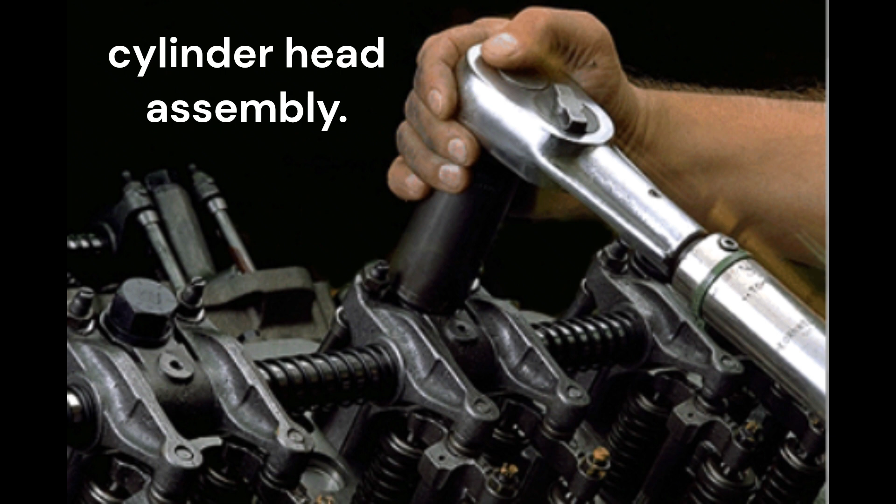Welcome back. Today we're taking a look at the cylinder head assembly. In this segment, you will learn about cylinder head components and the function of each component. You will also learn how an overhead cam engine operates and how its valve train differs from a push rod engine.

Cylinder head assembly. The cylinder head and its components are designed to make sure that the valves open and close, and that fuel is injected at the proper time for peak engine performance.

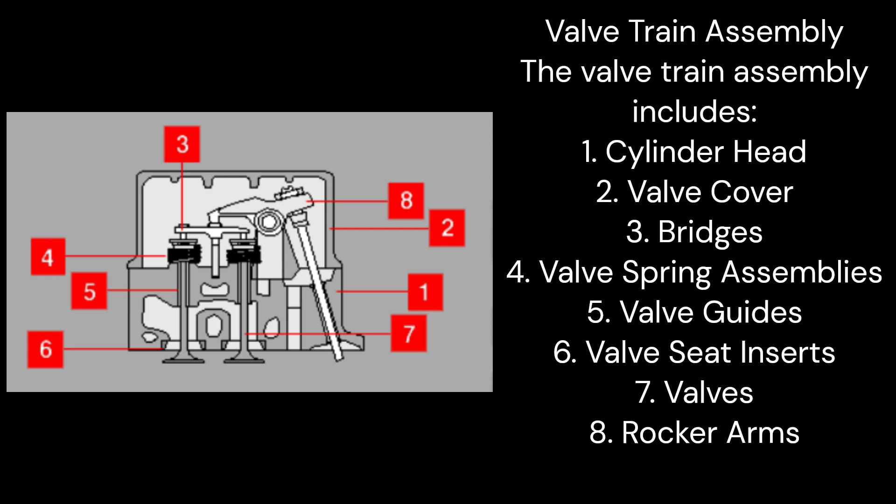Valve train assembly. The valve train assembly includes: 1. Cylinder head. 2. Valve cover. 3. Bridges. 4. Valve spring assemblies. 5. Valve guides. 6. Valve seat inserts. 7. Valves. And 8. Rocker arms.

Cylinder head. The cylinder head is a separate casting which seals the top of the engine block and holds the valves, injector or pre-combustion chamber in place. It also houses the valve train, some fuel system components, and water passages for cooling the parts.

Gasket and spacer plate. The cylinder head is seated to the engine block with gaskets, a spacer plate, and bolts or studs.

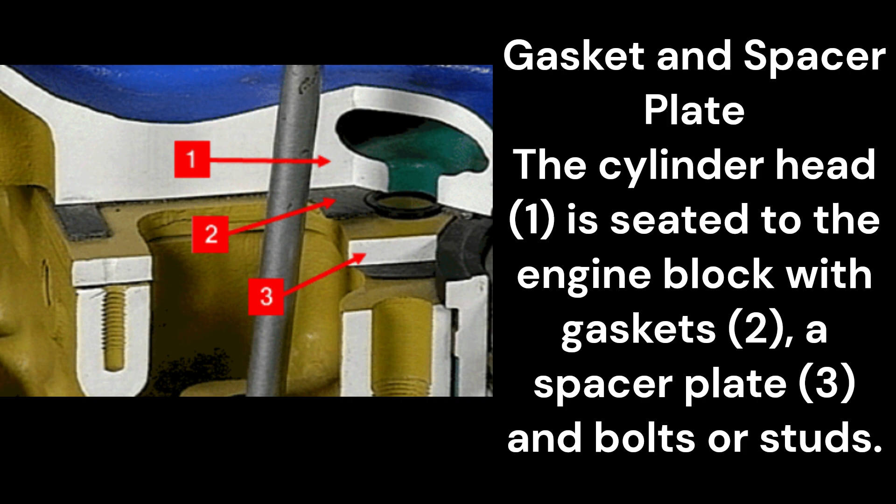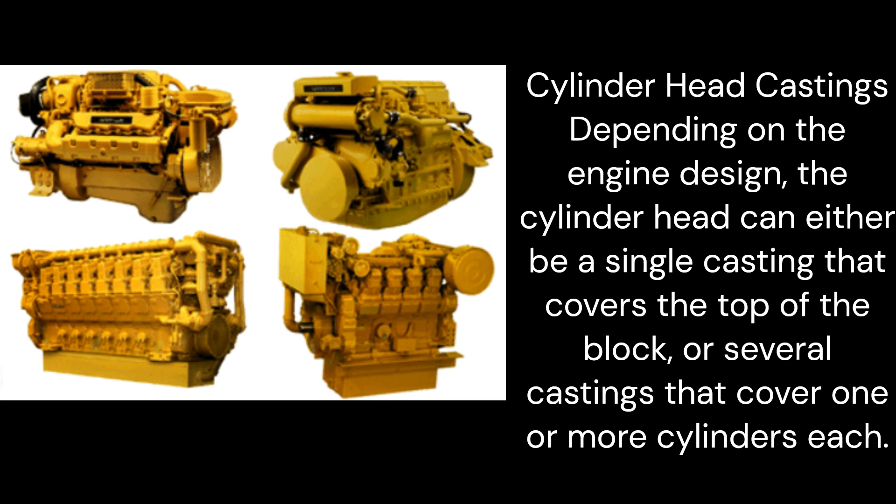Cylinder head castings. Depending on the engine design, the cylinder head can either be a single casting that covers the top of the block, or several castings that cover one or more cylinders each.

Valve cover removal. You must remove the valve covers in order to reach the valve train components.

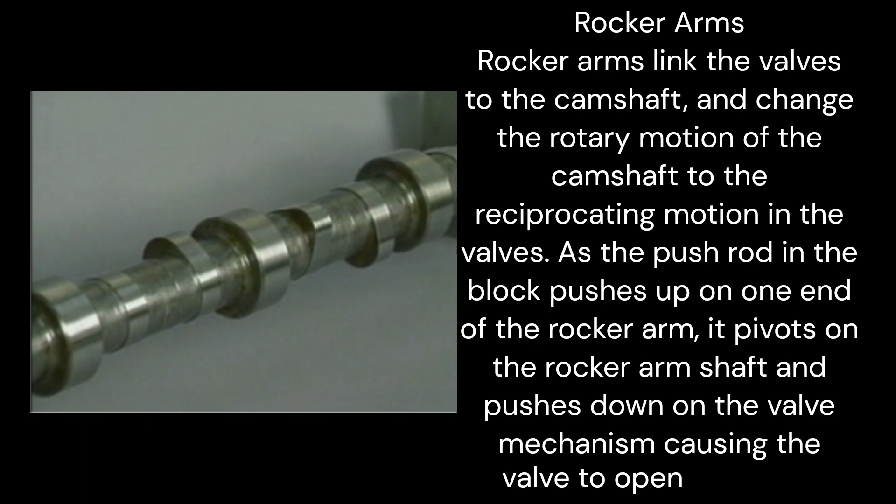Rocker arms. Rocker arms link the valves to the camshaft and change the rotary motion of the camshaft to the reciprocating motion in the valves.

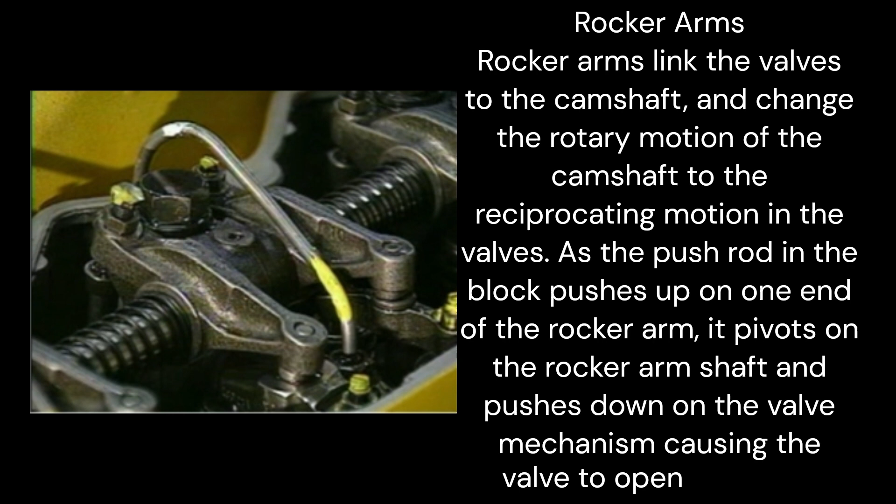As the push rod in the block pushes up on one end of the rocker arm, it pivots on the rocker arm shaft and pushes down on the valve mechanism, causing the valve to open. As the camshaft continues turning, the push rod lowers, and the force of the valve spring closes the valve.

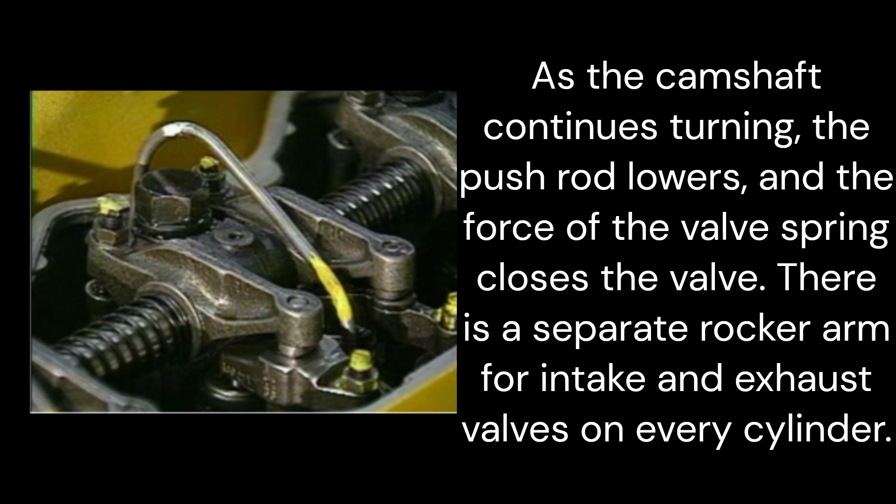There is a separate rocker arm for intake and exhaust valves on every cylinder.

Rocker arm components. A rocker arm consists of: 1. Adjusting screw, which adjusts valve lash. 2. Lock nut, which locks the screw in place to maintain lash. 3. Wear seat, a hardened insert that prevents rocker arm wear. And 4. Rocker shaft bushing, which provides a bearing between the rocker arm and the shaft.

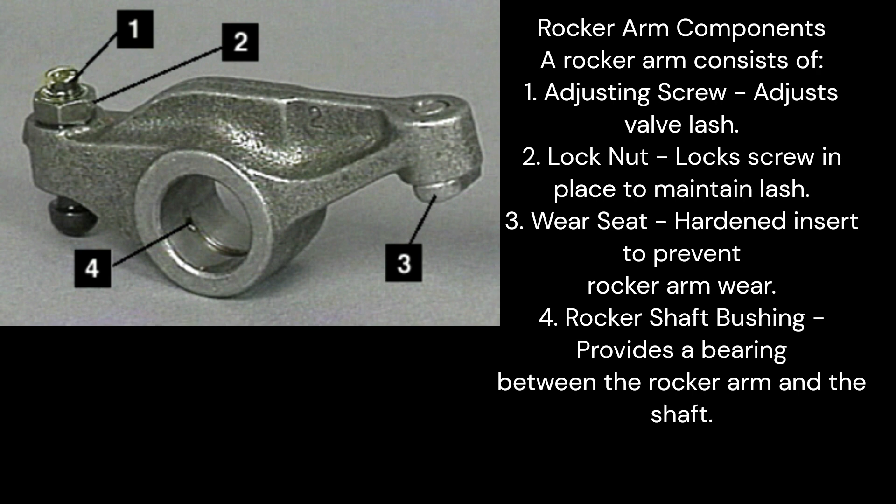Valve lash. The rocker arm pivots on a shaft that is usually fastened to the cylinder head. When the cam lobe starts to move the push rod upwards, there is usually a little gap or clearance between the rocker arm and valve bridge that assures the valve is able to close completely. This is called valve lash and is one of the more critical adjustments that must be made on the valve train.

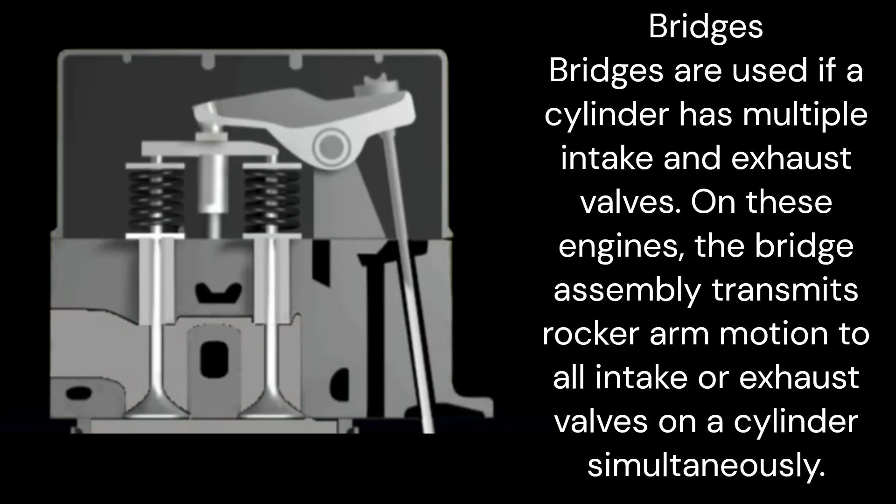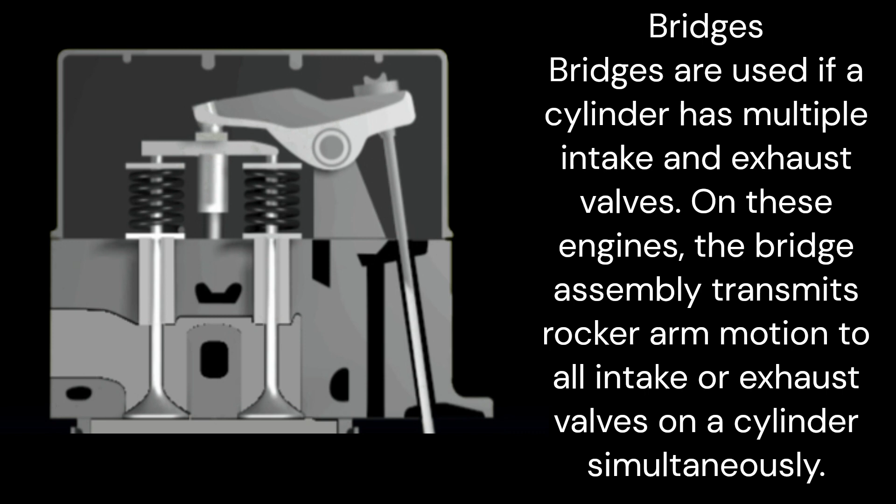Bridges. Bridges are used if a cylinder has multiple intake and exhaust valves. On these engines, the bridge assembly transmits rocker arm motion to all intake or exhaust valves on a cylinder simultaneously.

Bridge components. 1. Wear seat reduces bridge wear. 2. Adjusting screw compensates for differences in the height of the valve stems. 3. Lock nut sets the adjusting screw. And 4. Bore rides on the guide pin.

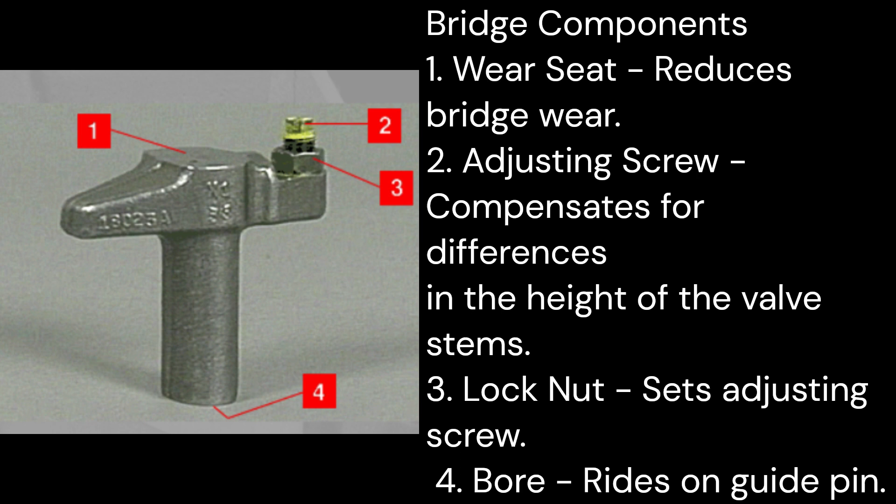Bridge dowels. Bridges fit on bridge dowels. Bridge dowels fit into bores in the cylinder head.

Valves. The valves control flow of air and exhaust gases through the combustion chamber. When the intake valve is open, air is allowed into the combustion chamber. When the exhaust valve is open, exhaust exits the combustion chamber.

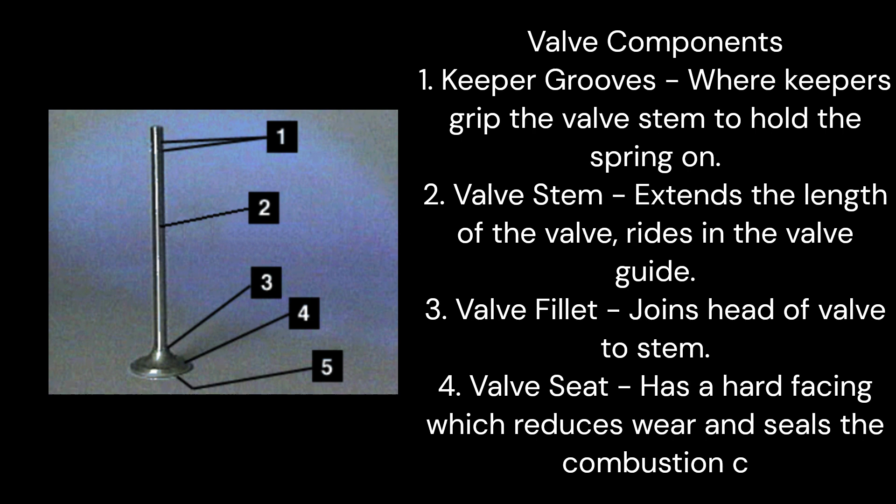Valve components. 1. Keeper grooves, where keepers grip the valve stem to hold the spring on. 2. Valve stem, which extends the length of the valve and rides in the valve guide. 3. Valve fillet, which joins the head of the valve to the stem. 4. Valve seat, which has a hard facing that reduces wear and seals the combustion chamber. And 5. Valve face, the flat portion of the valve.

Valve seat inserts. To completely seal the combustion chamber, every valve has a valve seat insert located in the cylinder head. When the valve closes, the valve seat contacts the valve seat insert. On most engines, the valve seat inserts are replaceable.

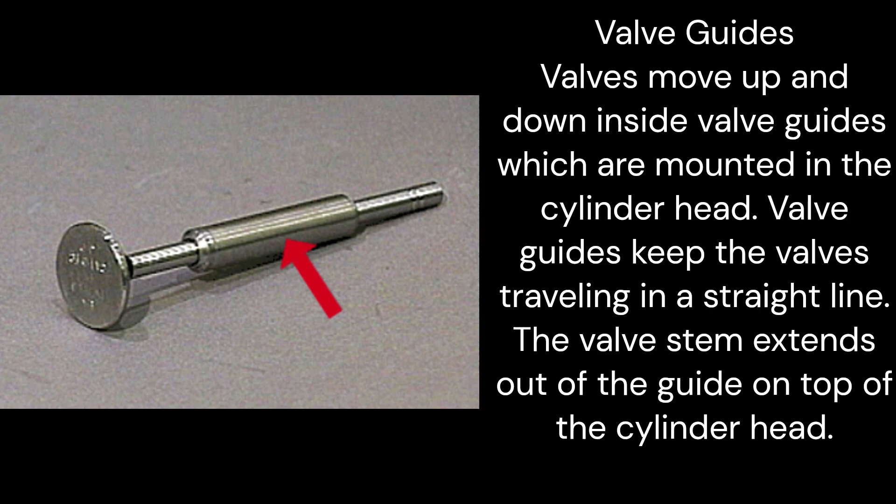Valve guides. Valves move up and down inside valve guides which are mounted in the cylinder head. Valve guides keep the valves traveling in a straight line. The valve stem extends out of the guide on top of the cylinder head.

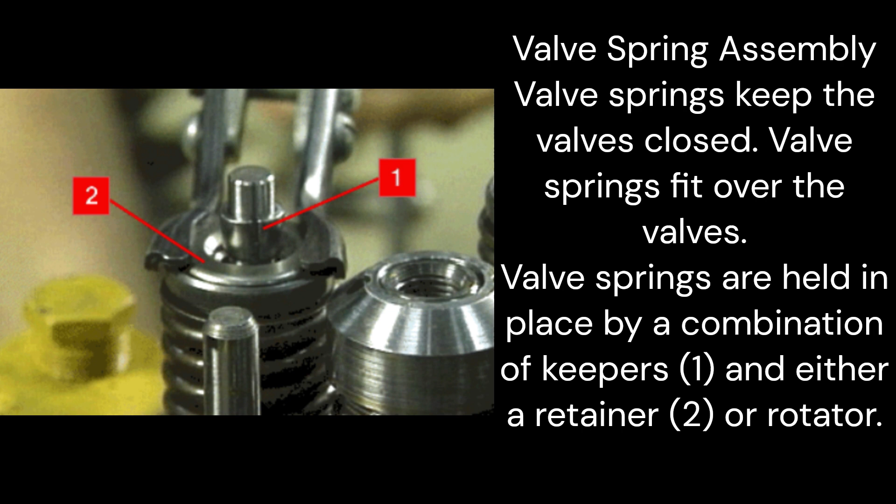Valve spring assembly. Valve springs keep the valves closed. Valve springs fit over the valves. Valve springs are held in place by a combination of keepers, and either a retainer or rotator.

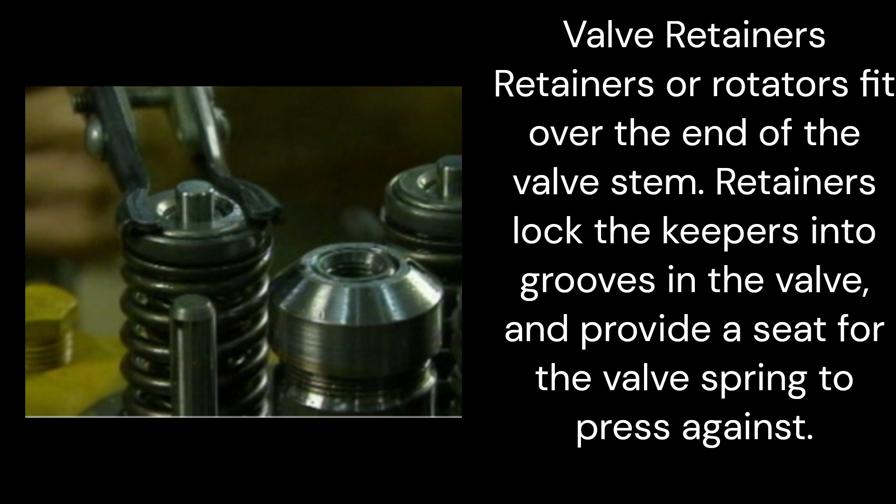Valve retainers. Retainers or rotators fit over the end of the valve stem. Retainers lock the keepers into grooves in the valve, and provide a seat for the valve spring to press against. Valve rotators. Valve rotators turn the valve to prevent excessive wear in one spot.

Major wear items. The valves, valve seat inserts, and valve guides experience the most wear because of the high combustion temperatures and pressures. All are replaceable components.

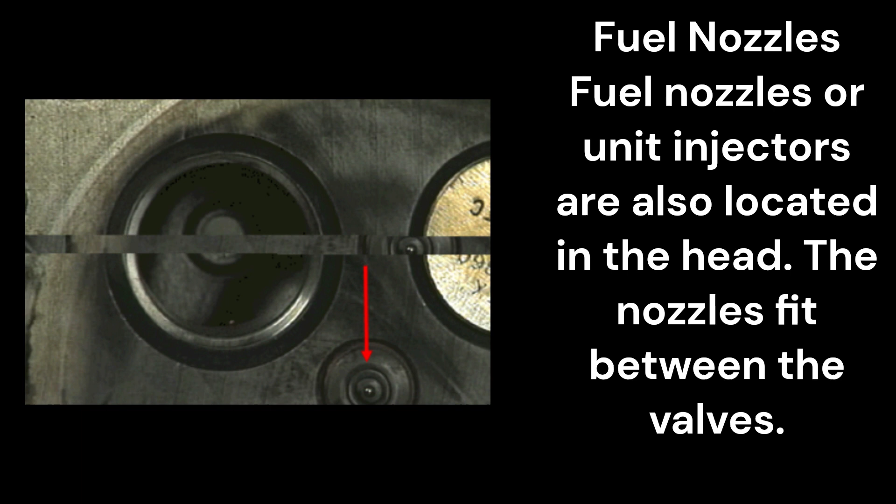Fuel nozzles. Fuel nozzles or unit injectors are also located in the head. The nozzles fit between the valves. Fuel nozzle mount: fuel nozzles are held in place with a sleeve, washers, adapters, and keepers.